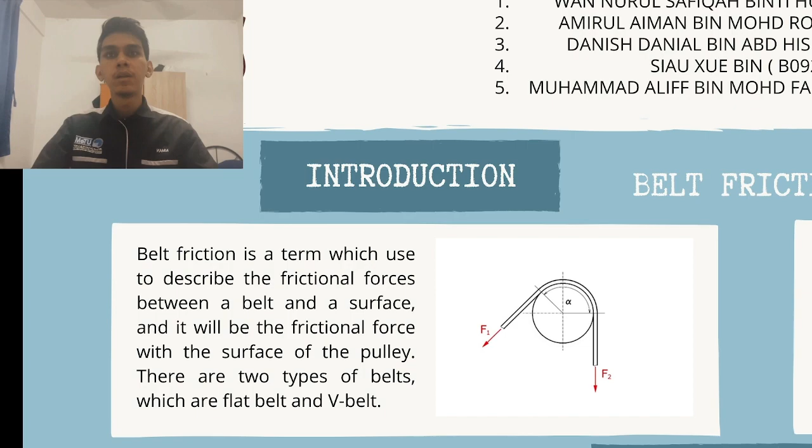Okay, so for the objectives, we already list three objectives. So the first one is to understand that tension acting on the belt or rope calculated by the belt friction equation can be compared to the maximum tension the belt can support, which means the belt friction equation is used to determine the tension acting on a belt or rope that is wrapped around a pulley or a wheel.

This equation takes into account factors such as the coefficient of friction between the belt and the pulley, the angle of wrap, how much the belt wraps around the pulley, and other relevant parameters.

And the second one is to understand the effect of friction in different types of belt, which means the effect of friction in different types of belt is a critical consideration in mechanical systems, influencing power transmission, efficiency and reliability. Understanding the frictional characteristics of belt types is essential for selecting the most suitable option for a given application and ensuring optimal performance.

Okay, the last one is to understand the effect of angle of lap around the pulley on torque transmission, which means the angle of lap refers to the angle subtended by the arc of contact between the belt or rope and the pulley surface. It represents how much the belt wraps around the circumference of the pulley.

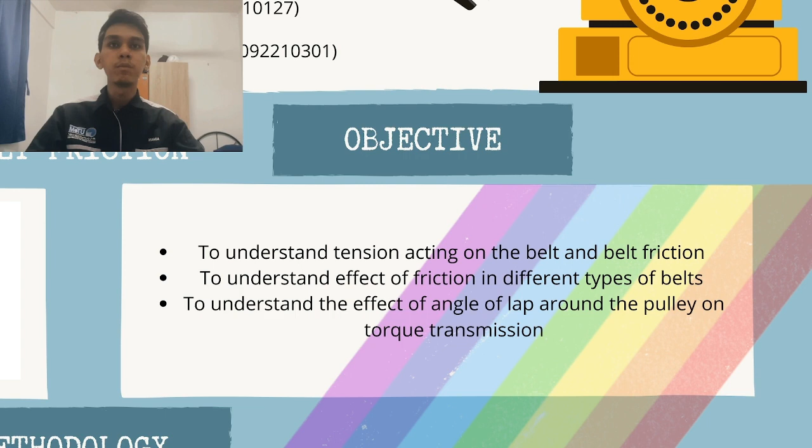My name is Wan Nurul Safiqah binti Hussein, so I will explain about the methodology of this case. So we separate it into two experiments, and I will explain about these two experiments. In these two experiments, we have the effect of different angle of contact and different belt material. But in these two experiments, both use a set initial F1 of 50N.

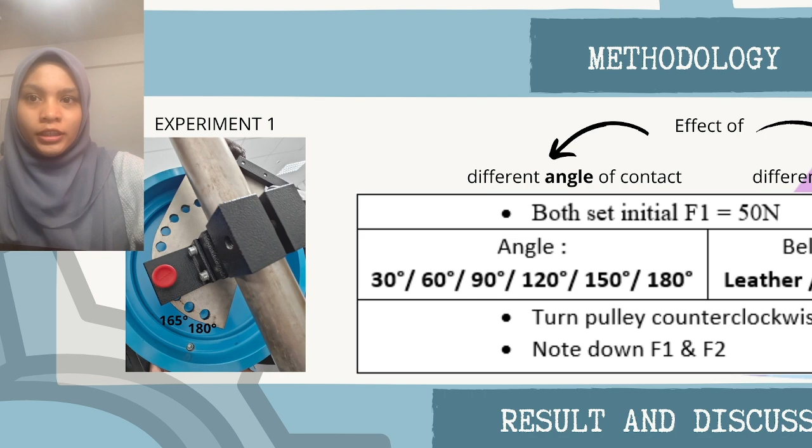Okay, so next the pulley was turned counterclockwise with constant speed, and the readings of F1 and F2 were noted down. So I will continue to the next experiment, which is experiment 2. We used a different belt material. So with different types of material, we have leather, hemp, and rubber.

The round belt hemp was placed into the flat groove, and the angle of contact was set to 180, and the initial tension F1, as I mentioned before, is the same as the first experiment, which is 50N. So the pulley was turned counterclockwise, and the readings of F1 and F2 were noted down, same as experiment 1, and the round belt hemp was changed to another type of belt. So by turning the pulley, the readings F1 and F2 for each type of belt were noted down.

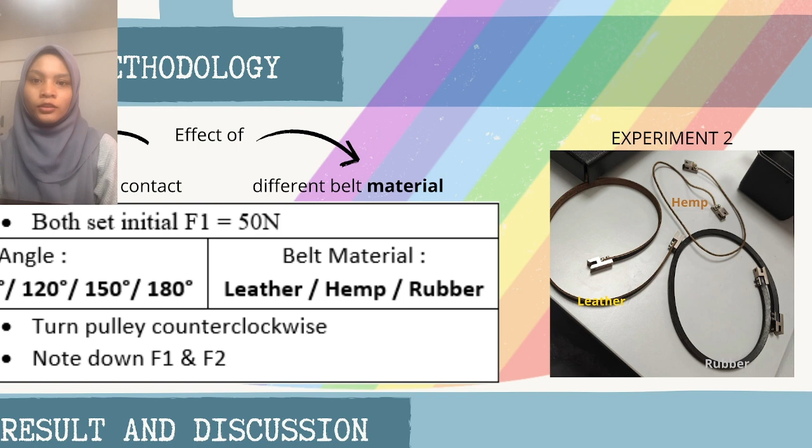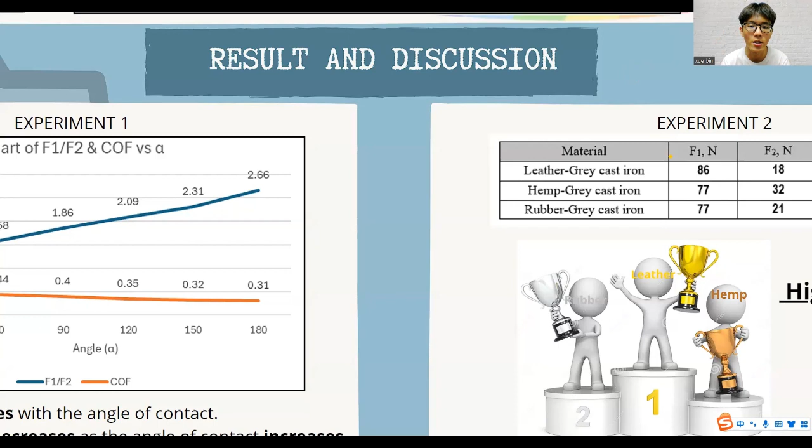Okay, my name is Siau Xue Bin, and now I would like to present my part, which is result and discussion. This is the result from experiment 1. The figure shows the chart of F1 over F2 and COF versus angle. In this chart, we can see that the ratio of F1 over F2 increases with the angle of contact. When the angle becomes larger, F1 over F2 increases. And we can see that the COF decreases when the angle of contact increases.

Now we move to experiment 2. In experiment 2 we used different materials. The first material is leather, second is hemp and rubber. And in this result, we get the COF. The leather is the champion, rubber is the second one, and the third one is hemp.

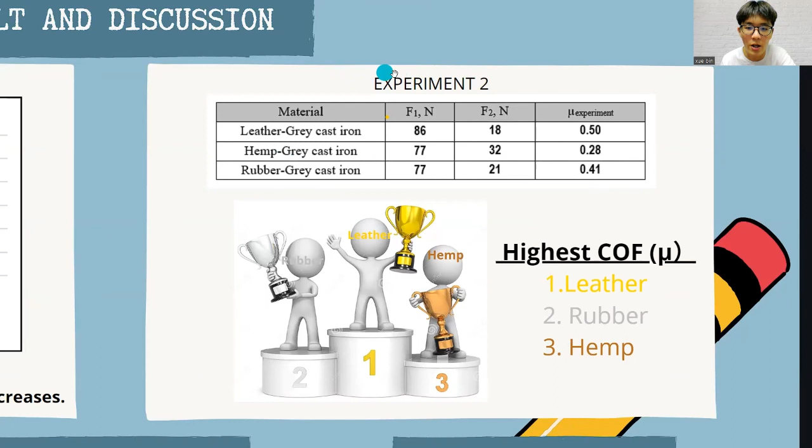Assalamualaikum warahmatullahi wabarakatuh. My name is Danish Danial bin Abdul Hisham, and I will explain the solution for belt slippage. First and foremost, a study was conducted in which a sensor was positioned to monitor the outer rim of each pulley and detect the transition of a reference point.

Upon detection, each signal is formatted and applied to separate inputs of the microcontroller using a software algorithm that determines the speed of the drive and the load in relation to the microcontroller cyclic program speed.

Furthermore, the difference in radial speed of the drive and load is attributable to belt slippage, and the results indicate that the developed V-belt monitoring system is very accurate at measuring this issue. The system can accurately determine the running state of the transmission system and present this with belt slip data locally and remotely.

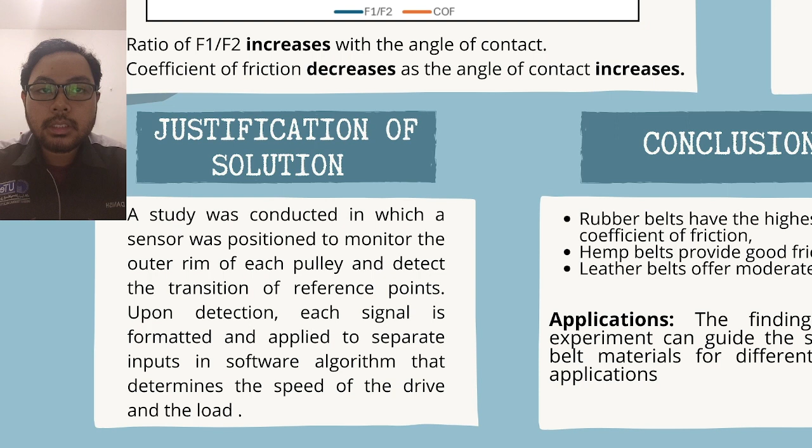Lastly, this system is robust, repeatable, and capable of logging the difference in radial speed of the drive and the load over a long time period. Therefore, it is capable of indicating when belt slippage becomes excessive. Thus, it can indicate to some degree the need for maintenance action on the system.

My name is Muhammad Aliff bin Muhammad Faudin, and I'm going to explain the conclusion. In conclusion, the rubber belt has the highest coefficient of friction, making it suitable for applications requiring strong grip and high frictional force. Second, the hemp belt provides good friction, but may be less consistent due to the natural variability in the material. And the leather belt offers moderate friction and a balance of performance and durability.

In the end, the findings of this experiment can guide the industry towards the selection of belt material for different industrial applications, where the choice of belt impacts the efficiency, durability, and performance of machinery.